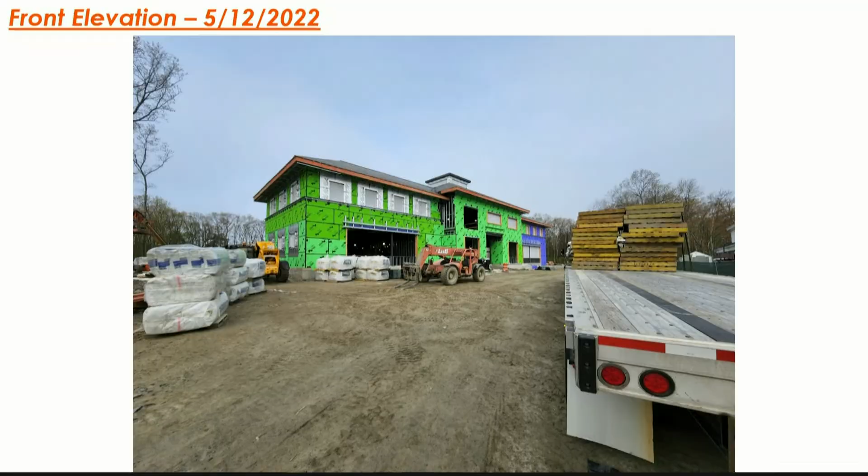Good evening everybody. I'm going to roll through some images of the progress. These were from Thursday. Quite a bit has happened over the past month, a little bit outside the building and quite a bit inside as well.

This is the front entrance, sort of a lot of patching and prep work. This being the last piece that they're going to clad. This one hasn't changed too much since the last update.

Things have been going pretty good. The masons' quality of work has been exceptional, so we're very happy with the product we've been seeing on site here.

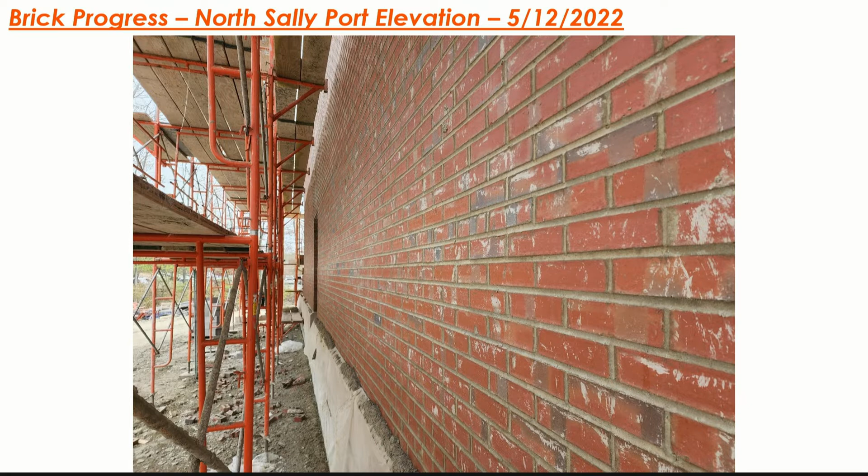Moving around, this is fitness, so you can see all the staging that's been going in. There's a lot of prep work for the mason - flashings and clip angles and things like that for the precast and brick. So that's what was going on here.

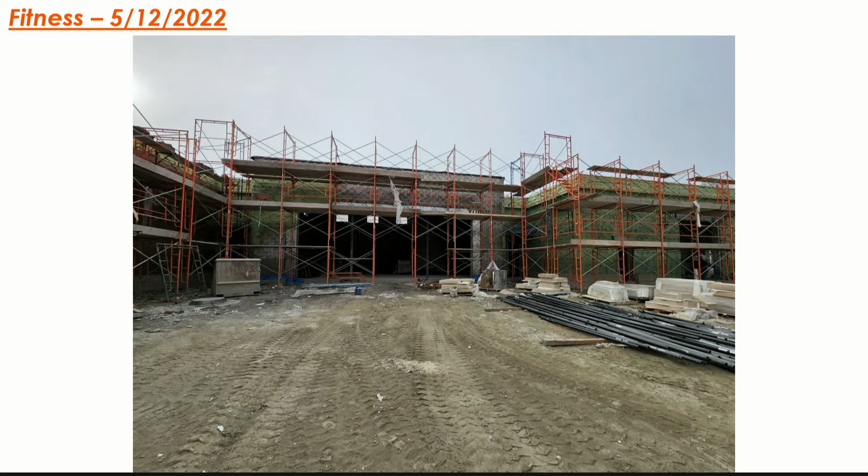I didn't get it into the presentation in time, but they actually just completed the precast surround around that big opening, that big window at Fitness. It's nice to see that going in - it looks great.

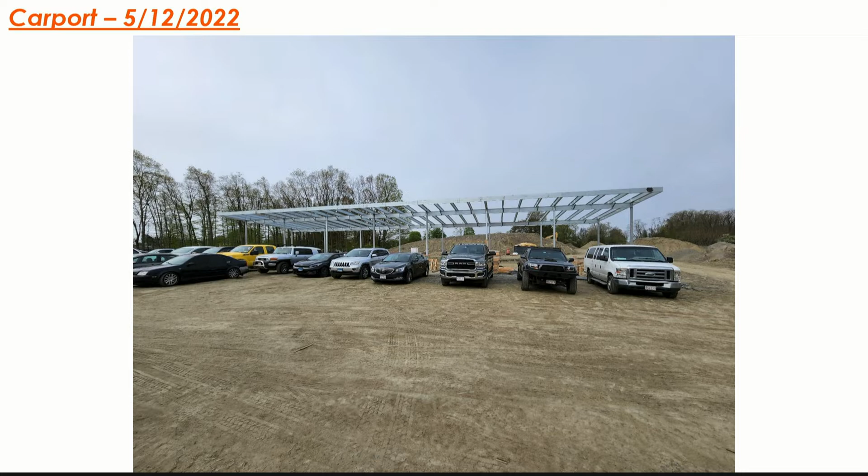The carport structure has been completed. This is the first view, looking from the garages out towards the carport.

If you go to the next slide, we'll zoom in a little more and you can see the rebar going around the piers. We do a concrete encasement around the bottom part of the steel, so the cruisers, when they're opening the doors, aren't going to whack the steel - it helps protect the structure. Once they form up those piers, get the concrete in and cured, they can start putting the roof on, and that thing will pretty much be ready to go. Good to see it went up nice and fast.

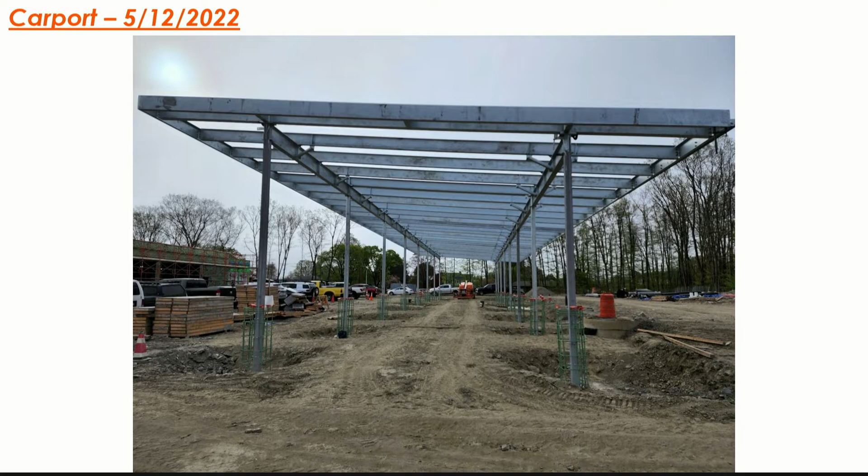Onto the interior - this is some of the support spaces in the garage. This is the main electric room, just getting really into the rough-in stage of the project. You can see all the block work has had the block filler applied to it, so they're getting those finishes on so they can start putting the panel boards and start pulling cable to them.

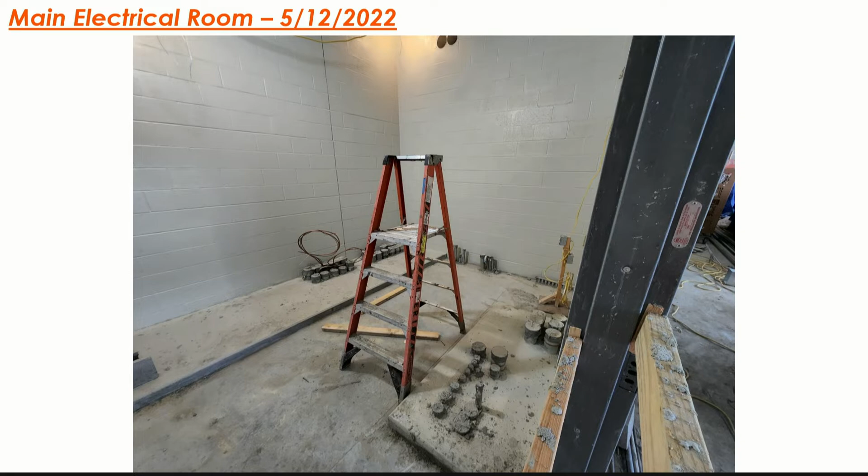On the interior, last month when we were here, we had just got the slabs poured, and now almost all of the light gauge metal framing for the ground floor is complete, except around the training room where they had a couple of pieces to finish. So most of the metal framing is in.

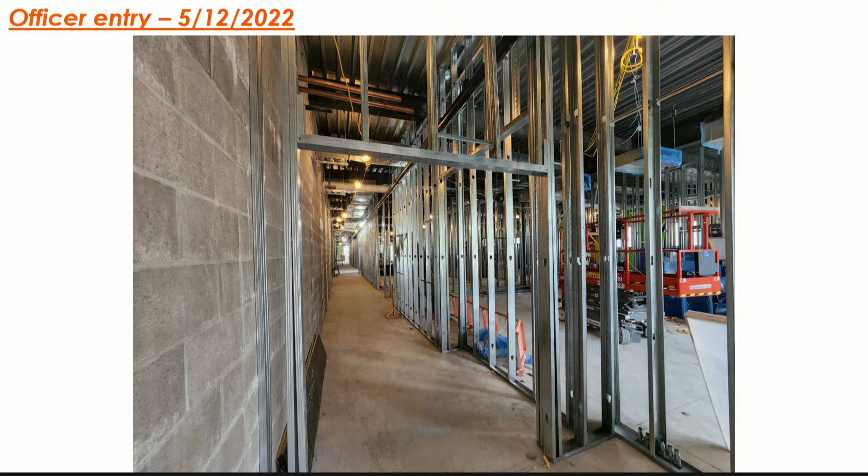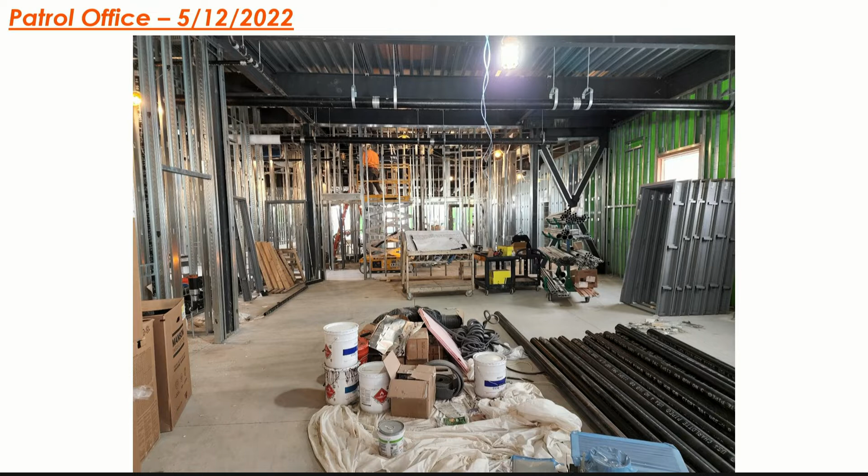This allows a lot of the more detailed roughing to happen, and once that's complete they can start sheet rocking down here. That was from the officer's entrance looking down towards the main entry, and this is the patrol area, where all the sergeants' workstations would be. Again, just all that roughing work is continuing on and getting ready for drywall.

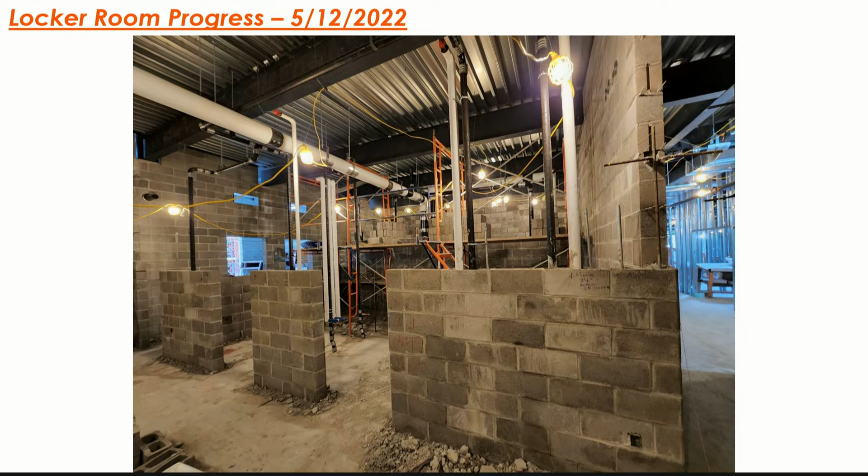Next one - this is the locker room. We're backed up against the garage, looking out over fitness.

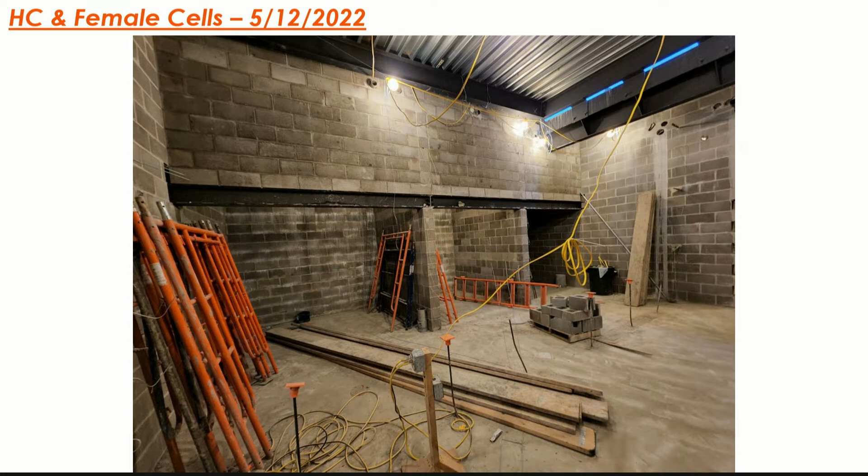Not too much has changed here. They're just getting ready for that interior window to go up. These are the cells, the handicap and female cells. That's where the sliding cell doors will go, underneath that beam that gets infilled with blocks so it's continuous. Last time we met they were just getting ready to put that piece of steel in, and now they've put the steel in and installed the masonry over that.

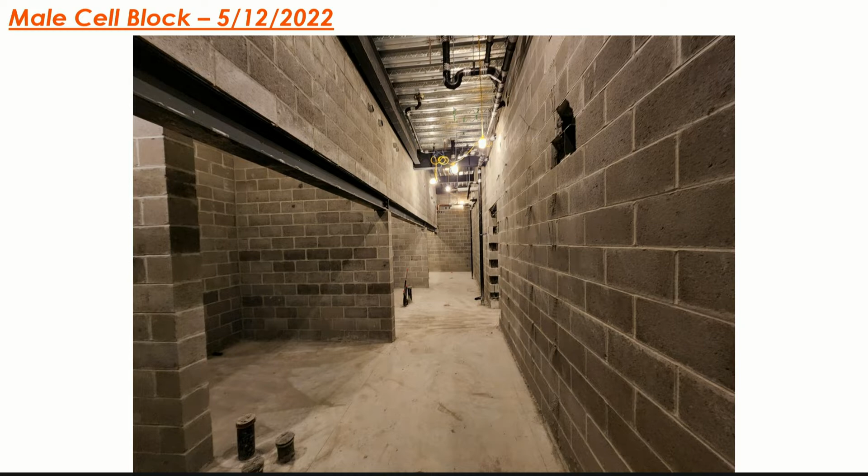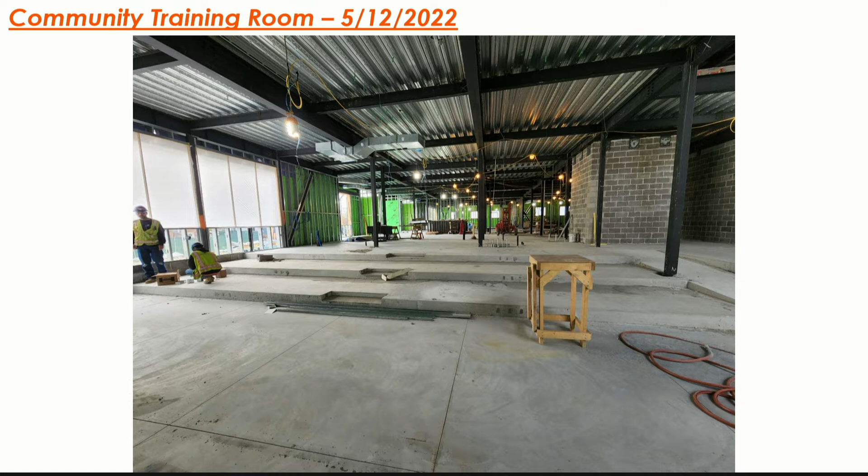This is the training room, so you can see the stepped seating areas. We're looking from the presentation wall toward the framed out areas for the glass exterior curtain wall on the left, and on the right side there'll be a wall where that column is coming down, framing out the extent of the training room.

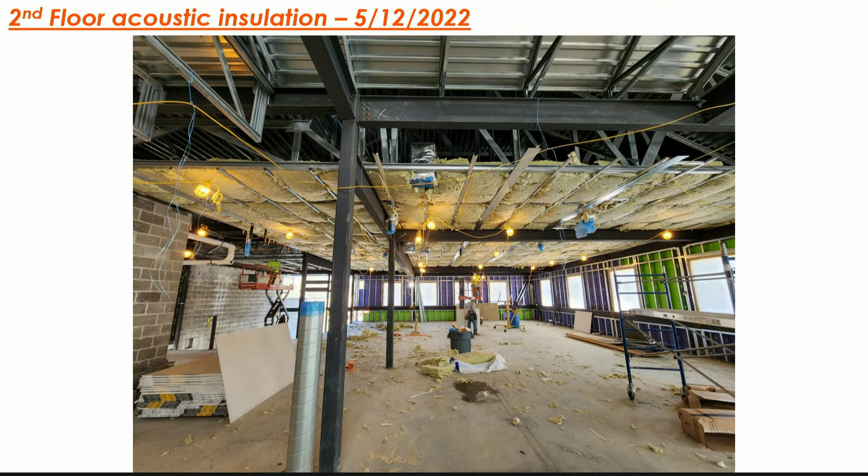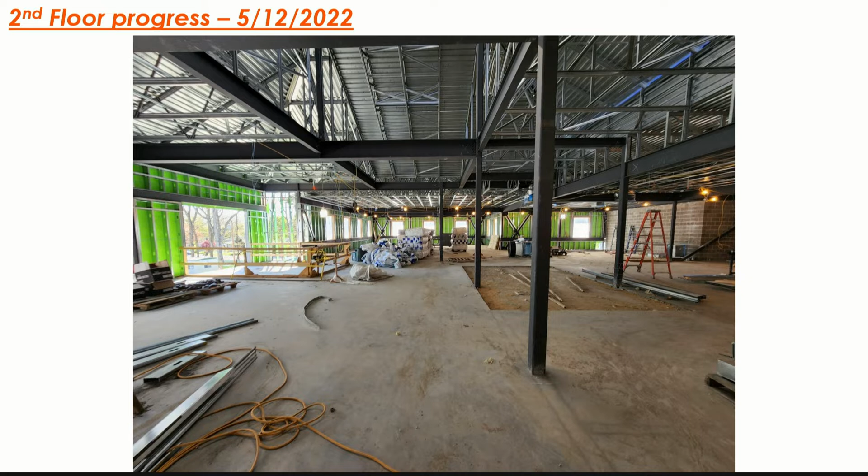Since the last time we met, not too much has changed from this view, other than a bunch more MEP roughing was ongoing, and that's sort of where we are.

Any questions? Donna asked, when could we do a walkthrough? Whenever you'd like—we were talking, guys, maybe in July, once the wall goes up? By July we should have drywall on the walls, so that will really best define the space. I think that would make a lot of sense, and we'll have both stairs up at that time. We have the one stair, so that way you can get the flow of the building, public versus private access.

But any day we can make work. Steve gives a great tour. It's just so much progress, and it looks like the Taj Mahal when we go by, so I can't wait to see it with the stonework on it. Some people are complaining about us spending a lot of money on the police station, don't need to hear about the Taj Mahal. I don't care, I'm proud of it, I think it's great. I think it looks great too.

Before last Friday, the last time I went to take pictures was the last Friday in April, I'm pretty sure. And the difference in just those couple of weeks inside was incredible. It's like when you build a house and all the framing's open, and you look at it and go, wow, this is really big. Now you start seeing the rooms. It starts closing in again, because the space is all getting defined.